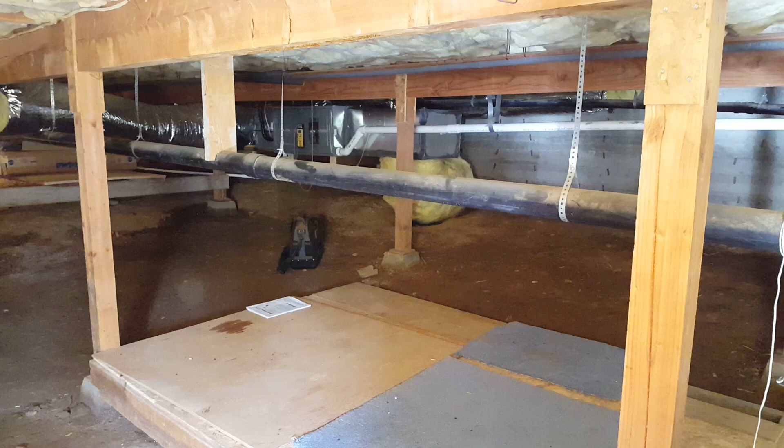So we are just finishing up a job we started last Tuesday. This was a package unit, had like 90 something on static, and we converted it to a split system. Load calc came back right at 2.5 tons. We ended up putting in a 3-ton. So I'm going to go over some of the system right now and let you guys see what we finished up with.

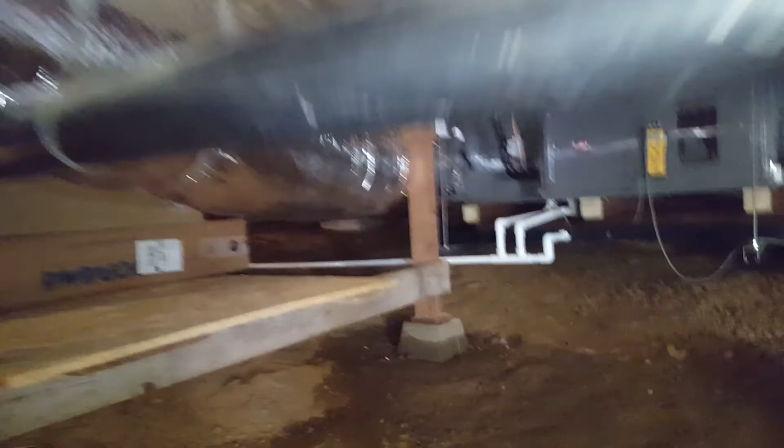So unit is set here. This is pretty much where you come in the door. The old package unit was out there. We set the new unit here. It is somewhat centrally located. For the most part, it's pretty close. Right now I'm checking my static, and it's not too bad considering all the boots on this house were all 6s and 4s, so I upsized a lot of them.

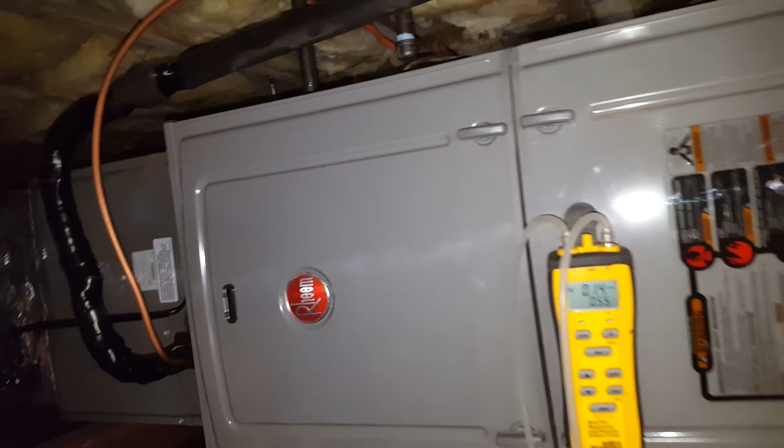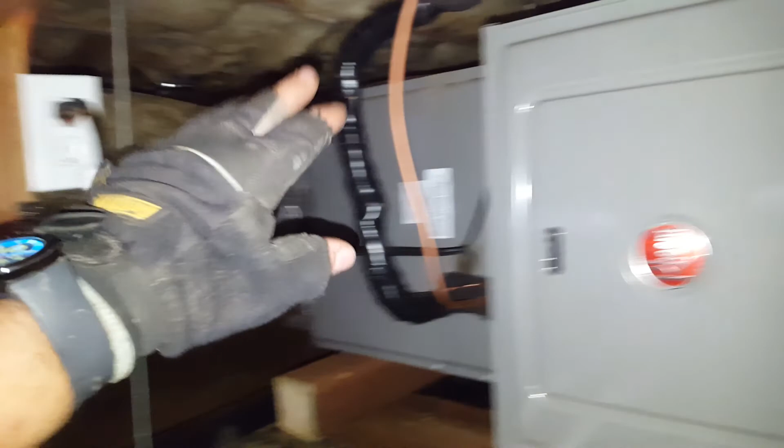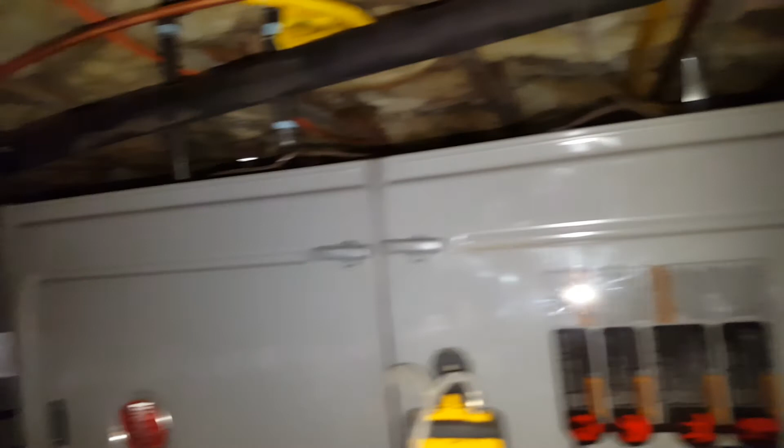We went with the Rheem, set it in a pan. Drain lines we combined into one. We put in a plug, refrigerant lines, gas lines, so the gas flex, and then we went with the WardFlex flexible gas line. Runs around the backside there, you can see it, and then it dives down over there in the corner. And everything's on pressure treated wood. We hung the unit.

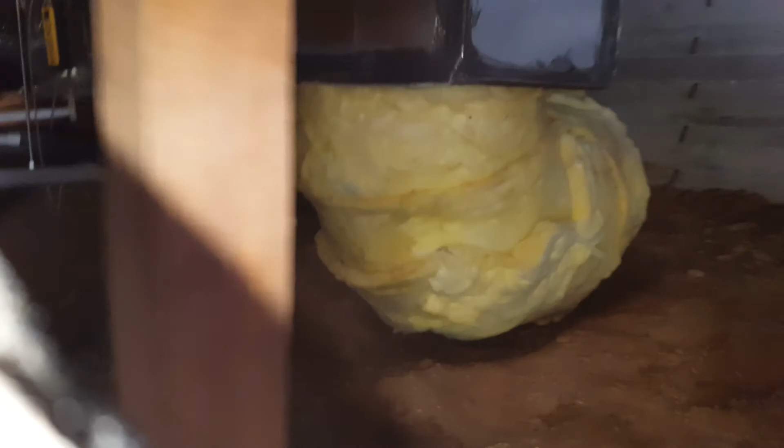So 20-inch return, and if it's in yellow, it's adjustable 90s. So there's 2 of those there, and then it shoots back there. I'll go around the other side so you could see where it went to. So we have here, this was a 4-inch run, adjustable 90 out of the supply. It comes up, and then we reduce right at the boot to try to get as much air as we could out of it.

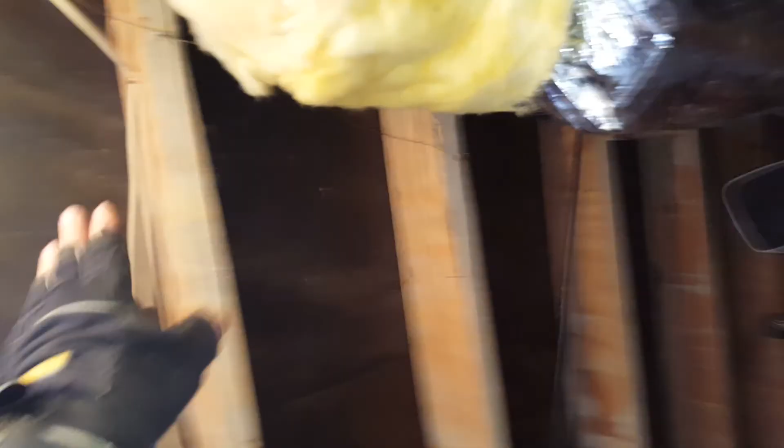Refrigerant lines come in here, and we just brought them straight up along with the exhaust, so that way this pathway here is still available to walk through. And let's take a look at the ducts. All the ducts on the exteriors I upsized, because the west is basically that way. The calc said exterior walls, and on the far side was where my load was. So this was normally a 6, we upsized to an 8, reduced right here. All the ducts nice and smooth, no crazy bends in anything.

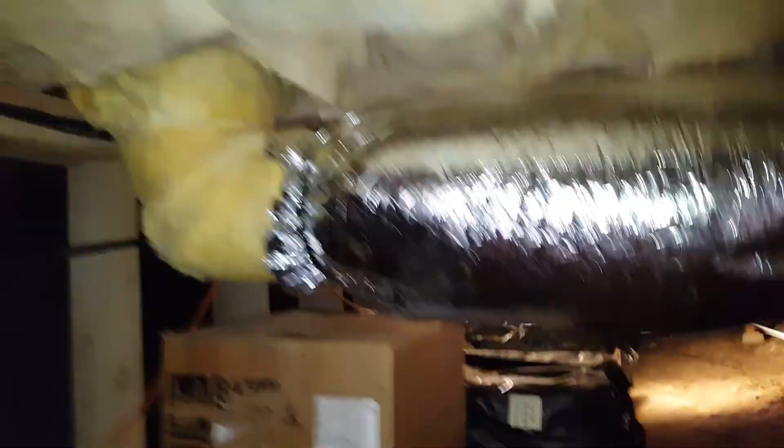Everything's nice and tight coming off of the plenum. This one was not upsized, has very little load. This one was upsized. This was a master bedroom, and I did damper it just in case the wife wants a little less air. Drain lines came out. We just ran it along here so that we could essentially have fall all the way out, but leave this area open so that they could walk. And as you can see, they have storage down here. Let's take a look over here.

Some of our longer runs, super nice and tight. This one came right off of the plenum, so it is dampered and shut down halfway. This is right in the very center of the living room, and there's really hardly any load there.

So here's the return. We ended up dropping a piece of sheet metal down, coming off the side of it with an adjustable 90 to get the angle to shoot over to there. It just has a little bit of a turn from a post that's down below. You can barely see it. That's touching it a little bit. But other than that, we got a pretty straight run off of it. So pretty pleased with how this job came out. We put a lot of time into it.

We reran the thermostat wire because the old one went through the attic, and this one needed to go through the floor. And let's take a look at the AC. It's always nice cleaning up, getting ready to pull off a job, get paid.

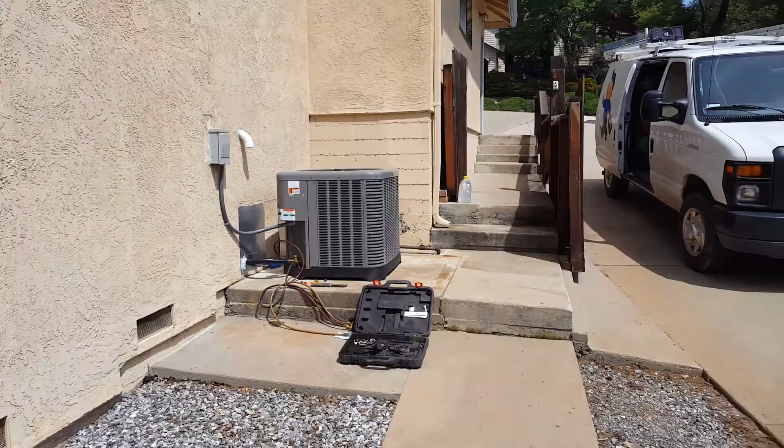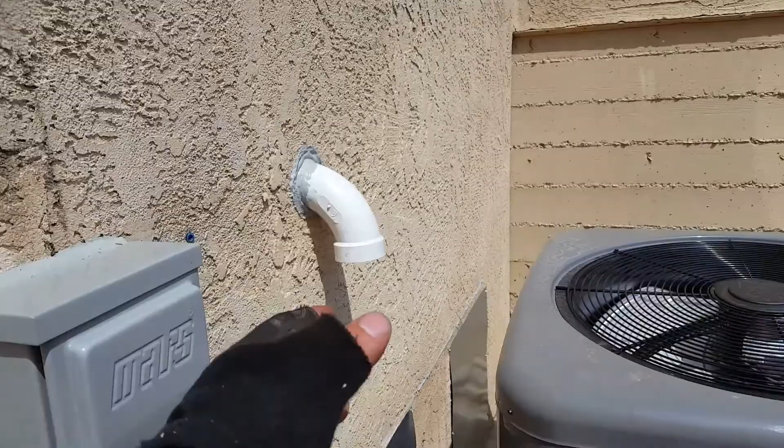So the AC, just ran it through the sheet metal from the plates from the old package unit where it went through with the ducts. They're just gonna patch these up and restucco them. New disconnect. Had huge holes along the side from the old, very big disconnect. I was really gonna use it, but when we went to hook up the inside, it was brittle. So replaced, set the new unit. This is really my only place for exhaust. It'll be just fine right there. Very happy with this install.

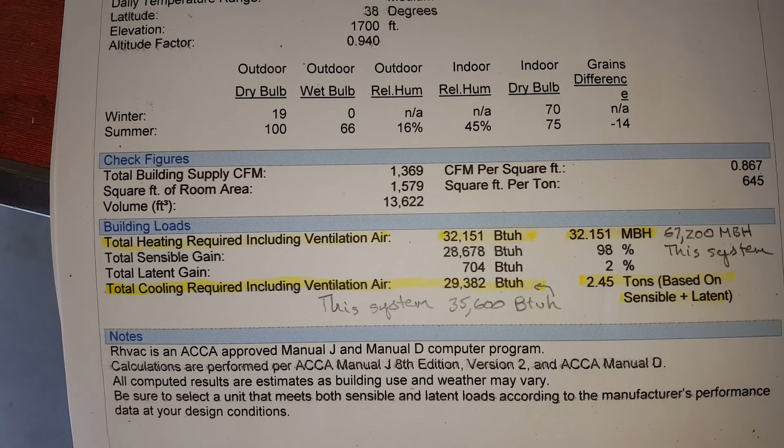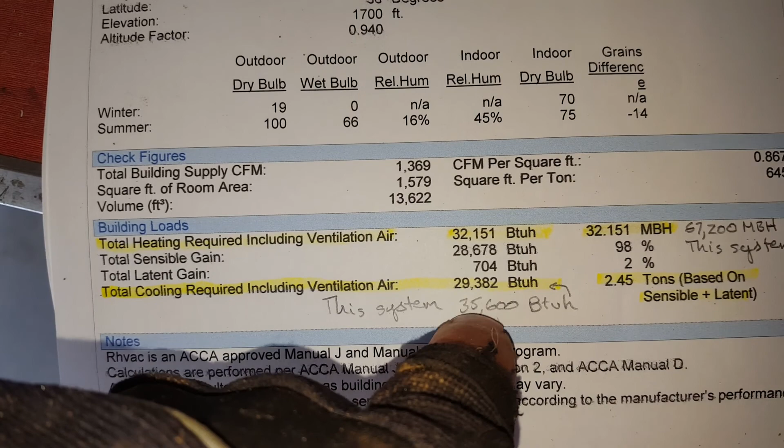I'll see if I can get the calc from the homeowner, and I'll show you guys how that all turned out. Alright guys, so this is the calc that went with this property. And so we are actually 6,000 BTUs over. I might have got away with a 2.5, but being so close, I just went with the 3 ton.

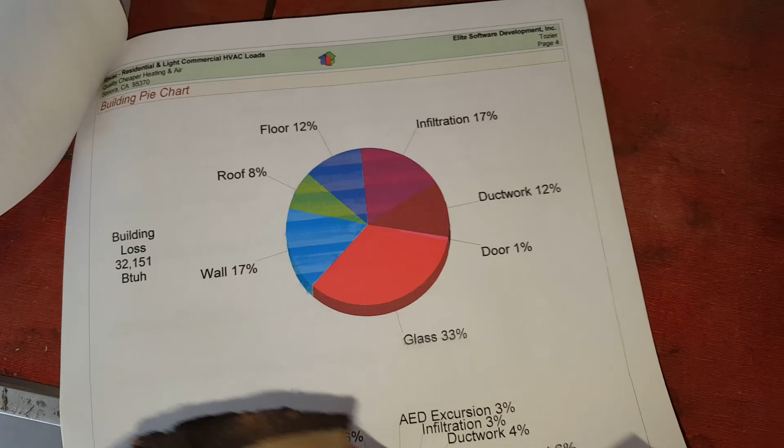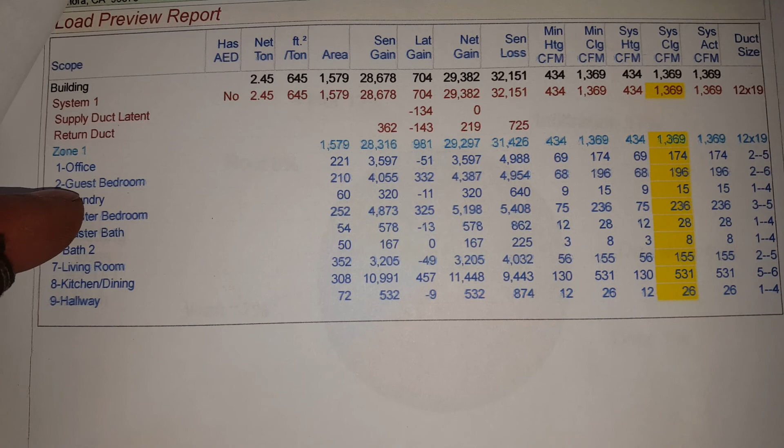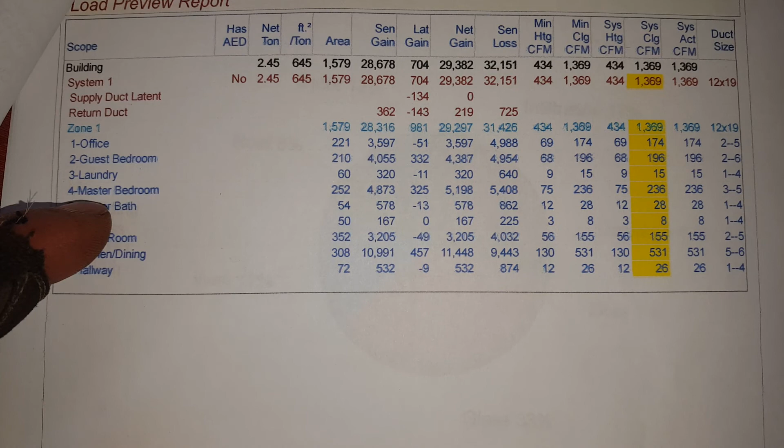Okay, so on our airflows here, the office is exterior. It had 174. The guest bedroom is exterior at 196. Laundry is internal at 15. Master bedroom is exterior. That's the one that I dampered. It needed 236, quite a bit of air. The master bath internal hardly needs any. Bath 2 needs very little.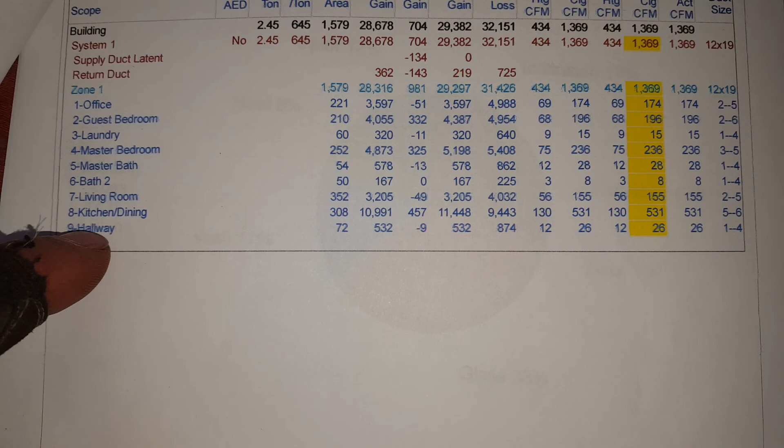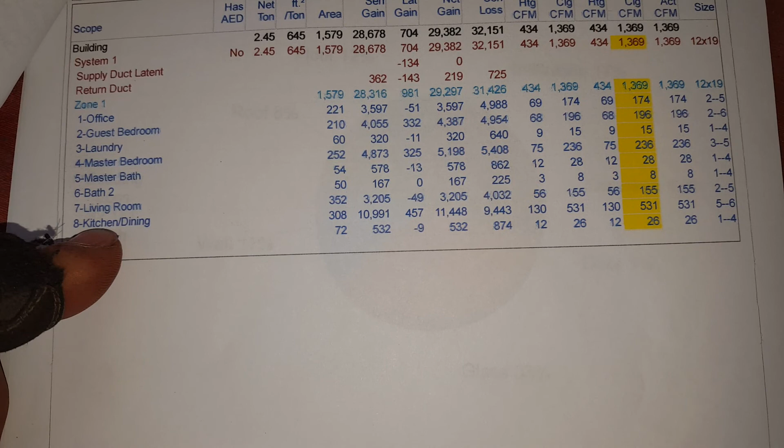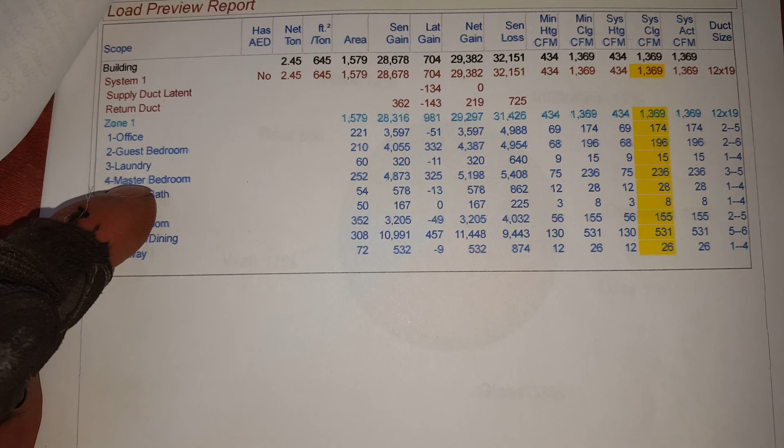The living room, the kitchen, and the dining, I actually did them together, and this is all exterior. And then I always upsize kitchen because they obviously have a load from cooking. And then the hallway was internal. So all my exteriors, kitchen, living room, master bedroom, guest room, and office, those all got upsized from 6s to 8s. And the kitchen went from a 4 to a 6. They just had a 4 run into the kitchen.

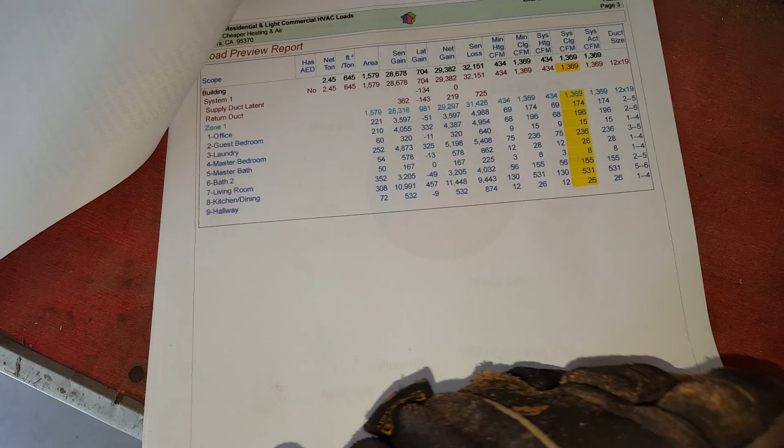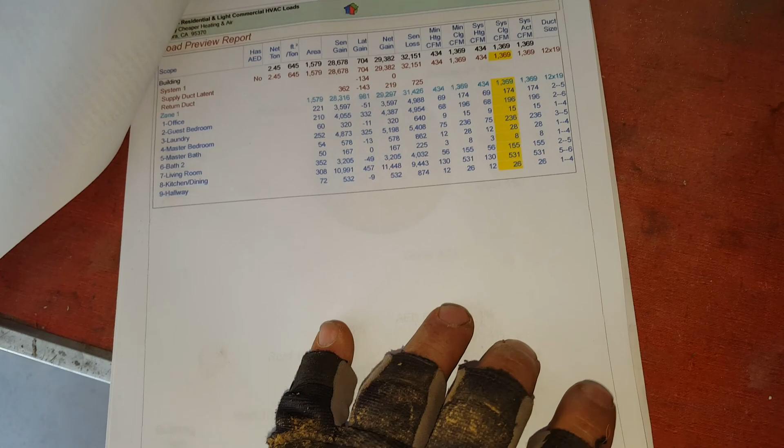It's unbelievable. So I went as big as I could to try to meet the static pressure budget. And as you can see, we got really, really close. I'm happy with what we ended up with. I wish it would have been a little less, but I'm okay with what we got.

So this is the home, and the furnace is located right here underneath. So here, here, here, upsized, here, here, and there's a vent here for the kitchen. All got upsized. This stayed the same, this stayed the same, this stayed the same.